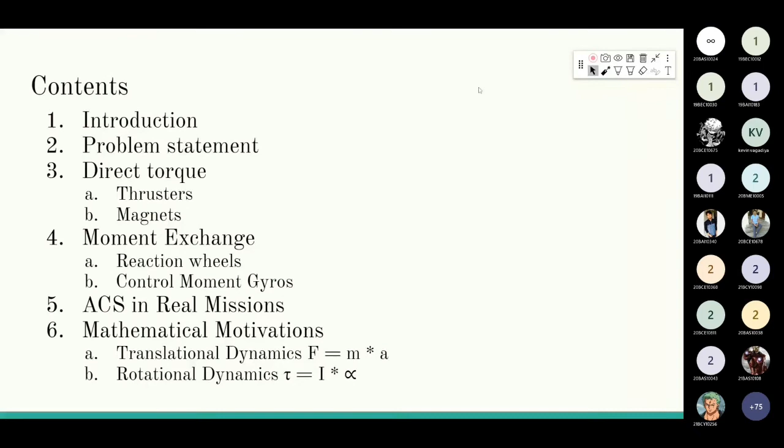Before continuing with the attitude determination and control system, I'd like to mention that Thanosat-1, the small satellite built at Orion Space, is about to be launched in January 2022, and it is already on its way. It is a very proud moment for us, because it is not only the second satellite launched by Nepal, but the first satellite that is completely built and about to be launched from Nepal.

And this is the satellite. Most of us are already aware of this fact, but if any of us are not, I'd like to mention that when we talk about satellites, we are not always talking about the big satellites that we see on TV and the internet. Satellites can range from the size of a house to the size of a Rubik's cube, and the reason behind that is because developing countries cannot dedicate their finances to the development of larger satellites.

So the concept of small satellites was introduced, so that even a university can provide the money to develop, launch, and operate satellites. And that is the class of satellite that we are working on in Orion Space. Those satellites go by the name of CubeSats and PicoSats.

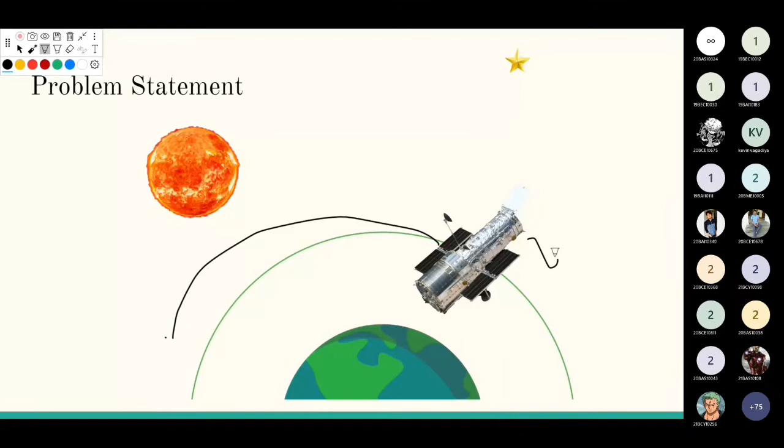First of all, let us imagine that we have a satellite orbiting around the Earth. This image is of the Hubble Space Telescope, so this satellite itself is a large telescope. Let us assume that the Hubble Space Telescope is supposed to take the image of a star known as A. But we can already see that from where it is now in orbit, it cannot point its telescope towards star A, because it is aligned in a direction that is not towards star A.

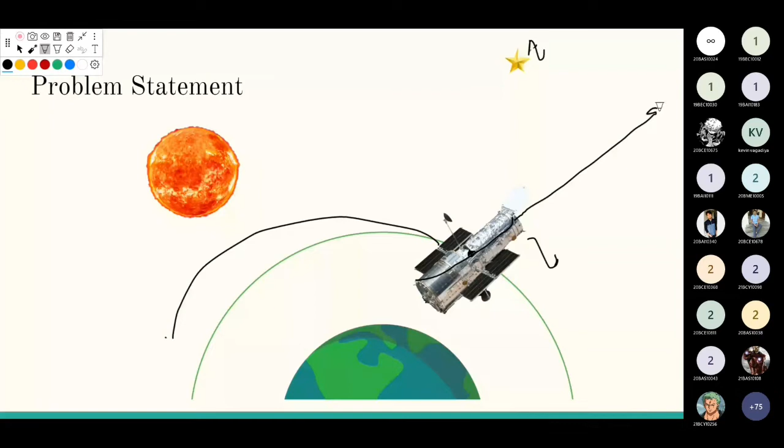So this is the problem statement we face when we build a satellite that needs pointing applications. And it need not be a telescope, it can be a camera. Let's say we have a satellite fitted with a camera and we are supposed to take images of India. When it is in orbit, if our camera is pointing towards the black void of space, then we are not able to take the image of India, because our camera is not pointing toward India.

So in such cases, what we need to do is rotate our satellite such that the sensor fitted in the satellite points toward the direction that we want it to face. So in our scenario, let us suppose the direction that our Hubble Space Telescope is facing right now is B, and the direction that we want it to face is A. So we need to rotate our satellite so that the telescope is pointing toward the star. And this is the type of problem that we are talking about when we talk about attitude control system.

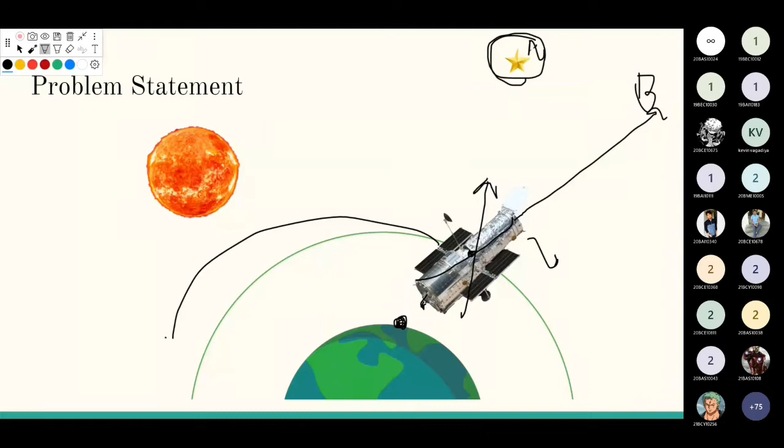So let us talk about the name itself. It seems funny because the word attitude comes with the word satellite, and please don't get confused by this, because the word orientation is often replaced by the word attitude when it comes to space technology. So whenever we talk about attitude in space technology, we are talking about the orientation of the satellite with respect to the Earth. So the term is attitude control system. We saw that attitude means orientation, so we are talking about orientation control system.

And as we can see from this problem statement, the orientation of our satellite is towards B, but we want our orientation to be towards A. So in order to do so, we need to point our satellite from B to A. And that sort of problem, where we take the present value of our satellite to the desired value, is known by the name of control system. So the attitude control system means the subsystem of the satellite that deals with pointing the satellite toward the direction that we want it to point.

So now we have formulated our problem statement. The content of today's talk, if we go in detail, is actually very vast, and mathematically it is also very rigorous. So the flow of talk that we have designed for today is what sort of technologies are used to rotate the satellite in its orbit. So before going on, it is very important to mention.

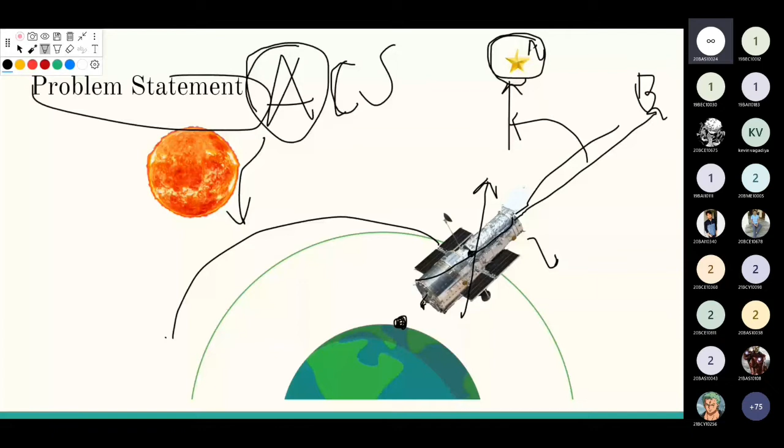Excuse me, sorry to interrupt, but your voice is a little bit low. It's not stable. Okay. Can you hear me now? Is it good now? Yes, it's good now. It's fine. Thank you so much.

And I'd like to mention that, as I have already talked about before, the satellite might not always be equipped with a telescope. It might have a camera or it might have a unidirectional antenna, the type of antenna which needs to face towards its receiver. When we use our phone, we need not worry about where the antenna of our phone is pointing, because the type of antenna it uses is known as an omnidirectional antenna. It captures electromagnetic waves from any direction. But if our satellite was equipped with a unidirectional antenna, then we must make sure that the satellite is pointing towards, let's say, India, so that the ground station of India is taking the signals emitted by the satellite. So in such scenarios we also need pointing, and so we need the attitude control system.

Similarly, we need attitude control system in interplanetary travel. Let's say this is Earth and this is the Moon where we are supposed to travel, and let's assume this is the trajectory that our spacecraft is supposed to follow. So we must make sure that our spacecraft is going in the direction that was already pre-planned. If our spacecraft is directed toward this direction, then the members on board will never reach the Moon. So attitude control system is also very important in such scenarios.

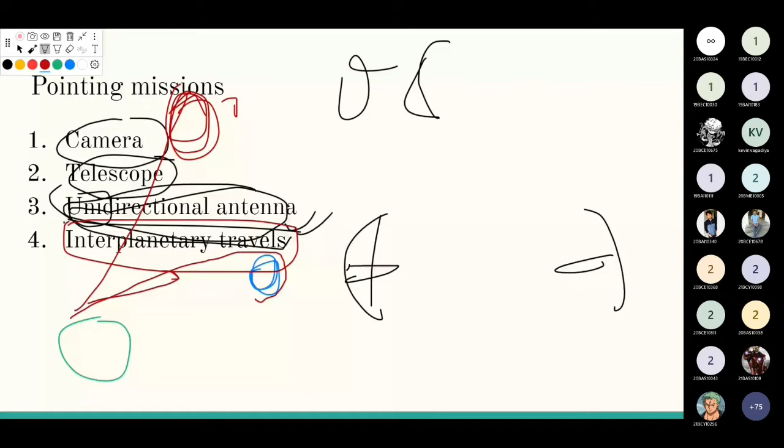So the first type of technique that we will use is known as the direct torque technique. And I think the term direct torque technique is not actually the term used in literature. I have used this term just to classify the type by which we move the satellite. So it will be better if we go into what direct torque means instead of pondering upon the term itself. So let us suppose that this is our cube satellite,

and also let us suppose that this green arrow denotes the direction of the camera, and currently our camera is facing toward this direction. And let us also suppose that we want our camera to face towards this direction. So the most reasonable thing to do in this scenario is, if we assume that the center of mass of the satellite is this, then we can provide torque from this direction so that our satellite will rotate in the counterclockwise direction, and the green arrow, that is the present orientation of our camera, will match with the expected direction of our camera, so that our camera will face toward the direction that we want.

This is the direct torque method. You actually apply torque to the satellite so that it rotates. But there is one huge problem. Let us imagine a man applying torque to this point on this vehicle, and he is using this rod to apply the torque.

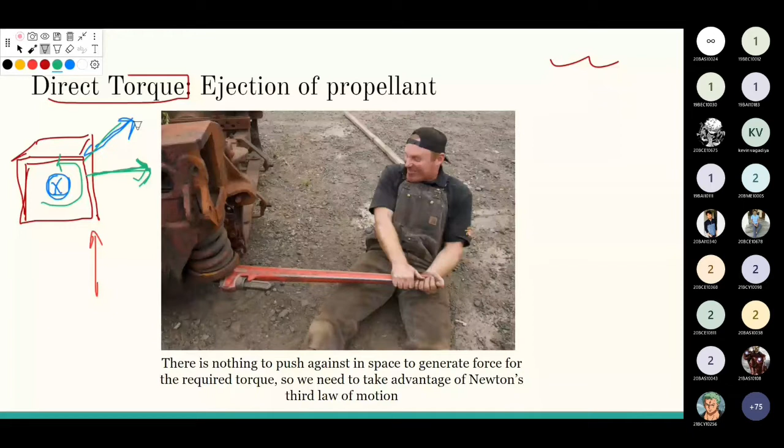And it is common experience that in order to apply torque, we always push against something. Let us suppose this was a wall and this was a person pushing the wall; then his legs are pushing against the floor in order to provide enough force to the wall. And in this case also his legs are pushing against the ground so that he can pull this lever more strongly. But it is a very well known fact that there is nothing in space to push against, because space is void in the vicinity of our satellite. It is only our satellite that exists in space.

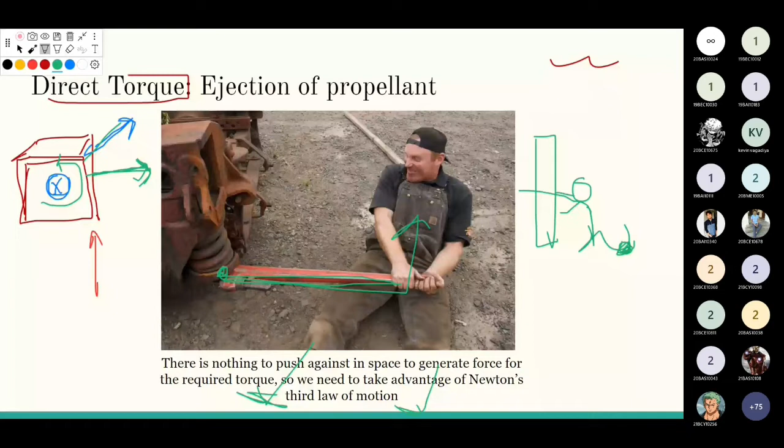So in order to provide the torque that we need to direct our satellite to the required direction, we do not have any point to push against. And that is the real problem. So that problem is solved by taking advantage of Newton's third law of motion. Instead of imagining that we need to provide torque to our satellite from an external direction, we can do something creative. That is, we can eject some high speed particles from the satellite in this direction.

And we know that Newton's third law of motion says that for every action there is an equal and opposite reaction. So if we eject high speed particles from this point, our satellite will experience an opposite force in this direction. Let's say this was our satellite and this was our man, and his legs should be pushed against some firm ground in order to apply torque. So this was the problem. So we eliminate this man and we put some sort of nozzle which emits particles at very high speed, so that an opposite force is applied in this direction, which works as if the man was pulling the lever.

So when it comes to attitude control systems of satellites, there is always involvement of some sort of propellant. This example can directly be related with how the rocket works. Let's say this is the rocket and this is the nozzle, and when the fuel is burned above the nozzle, high speed combustion happens and the opposite force is experienced by the rocket, which is lifted off the ground. In a similar fashion, now we are not putting our nozzle aligned with the center of mass, but offset from the center of mass, so that instead of moving forward, our cube satellite rotates toward the direction that we want it to rotate.

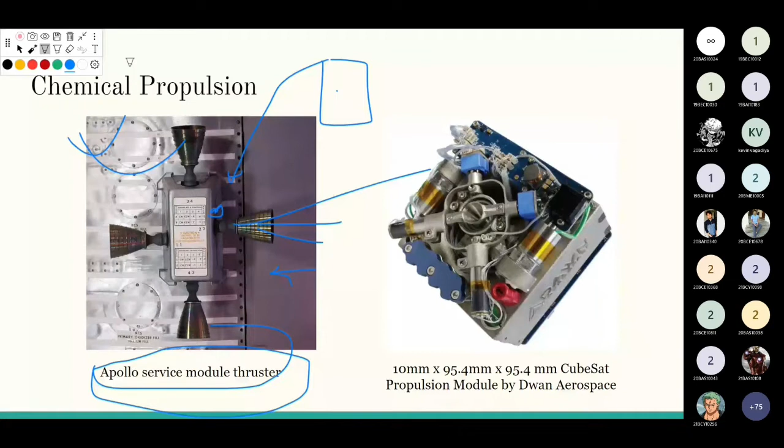And this picture is of the Apollo service module that was used in the moon mission, but it is for the large mission. This sort of chemical propulsion is also used in small satellite missions. For example, this propulsion unit that was developed by Dwan Aerospace is 10 mm times 95.4 mm times 95.4 mm.

So we can imagine that small modules are also made, but there is one strong disadvantage, that is the propulsion element inside the fuel tank might get finished, and as the satellite itself is a smaller one, there is not a chance of putting a large amount of propulsive element, chemical, inside the tank. So chemical propulsion systems are attractive only to larger satellites, but are not widely used for small satellites.

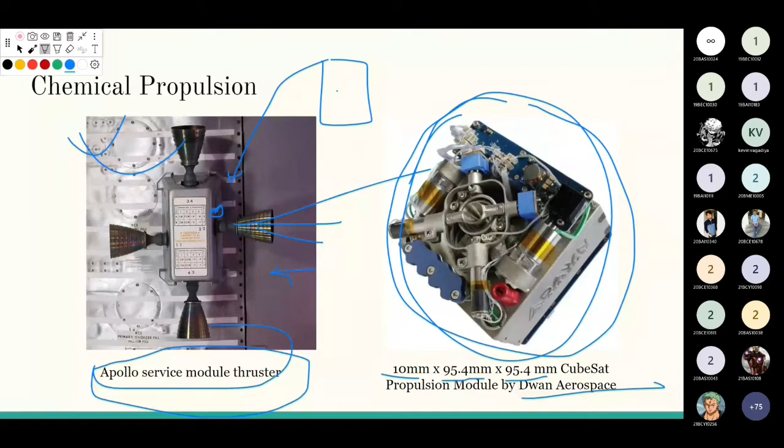And propulsion for small satellites is also an area of active research interest. And I've included some of the projects that I found very interesting while I was researching in this field. And the next type of propulsion system that provides a direct torque is the micropropulsion system. The mechanism of how the micropropulsion system works can be evaluated from this contraption here.

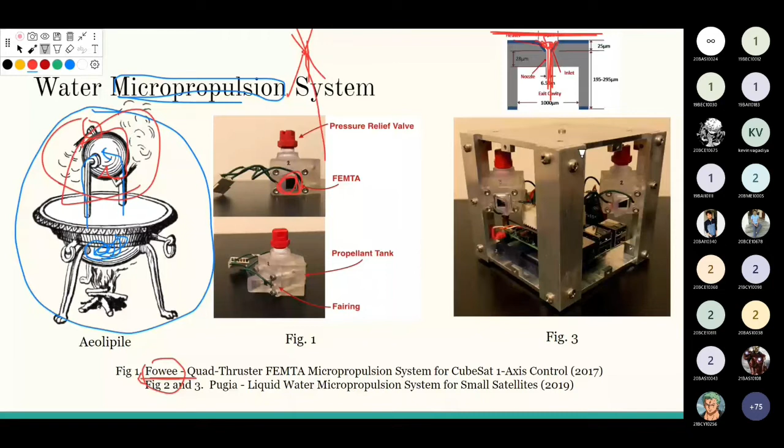And you can see this is a CubeSat, 10 centimeters by 10 centimeters by 10 centimeters, and they have created this one module. So they successfully used these three modules in the CubeSat in order to demonstrate the effect for their thesis. And it was a very interesting project. And the drawback of this system is, as always, there is a limit to how much water we can put. But the advantage is that they developed the system so that with less electricity, they could provide reasonable torque to move the satellite. So this is one of the interesting recent projects.

As you can see, the second version of this project was done by other students of the same research professor with whom Catherine works, and they actually extended the project of 2017 to their own thesis in 2019, and developed a better version of the project that was done before.

And this is one class of propulsion system, and there is another class of propulsion system where the idea behind the provision of torque is the same. There is always ejection of some material at high speed, but the way the material is ejected is different here. In this system, the propulsive elements are ejected by strong electric fields. And I have provided the link to the project that I have taken this image from in this slide, which I can share after the talk also.

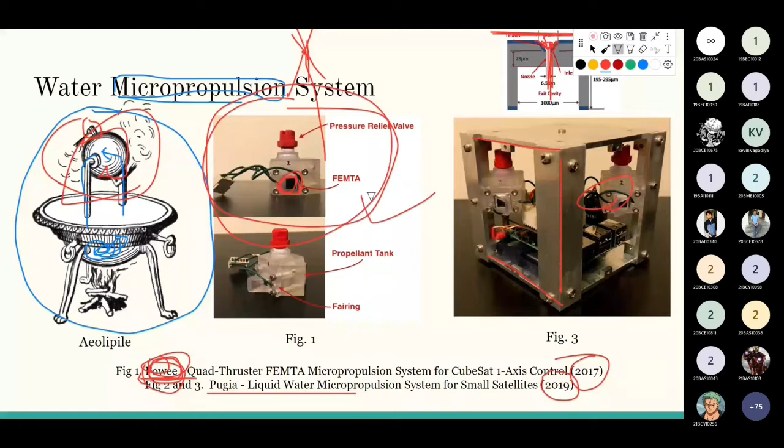So we finished the class of methods that can provide torque, which we named direct torque. And as already mentioned, these types of systems are not yet fully developed and are in the research phase, and they are not attractive when it comes to setting up in our CubeSat. They are only used for experimental purposes, but they are getting better. But the ones that are already established and widely used in space missions are those which use magnets. So how do magnets play their role in the attitude control system?

Let us dive into that. Let us suppose that I have a satellite and I have fixed a permanent magnet in it. So when my satellite is deployed into the orbit, my satellite starts moving. It rotates around the orbit, but it also rotates around its own axis. The term is tumbling. So it is moving forward in orbit, also rotating on its own axis.

So what happens is that if we put one permanent magnet inside our CubeSat, the magnetic field of the permanent magnet and the magnetic field of the Earth interact until the magnet inside the satellite is aligned with the Earth's magnetic field. So it is very simple, a control system that works without any coding or software.

You just plug a permanent magnet inside your satellite, but there are also some points where we can be clever. We can align our magnet in such a way that whenever it aligns with Earth's magnetic field, when it is above India, we place the camera such that it will point towards India. So we can be clever.

And I'd also like to mention that SANOSAT-1, which is about to get launched, uses this sort of technology. It uses passive magnetic attitude control by using a permanent magnet. And for our next satellite, we are working on a more advanced type of control system which we are going to discuss now.

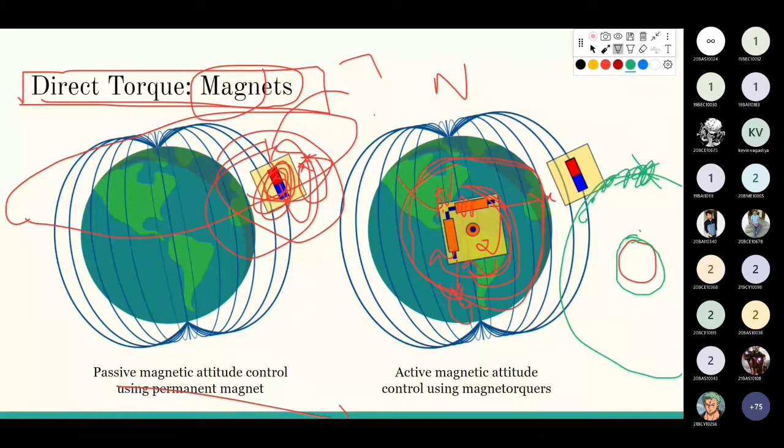So this type of magnetic technology is only used in low Earth orbit, that is those orbits which are very near to the Earth. And CubeSats and PocketSats are usually low Earth orbit satellites, so it is a very reasonable technology for cube satellites.

But I think the most widely used and most effective type of actuator, the technology that we can use to rotate our satellite to our desired direction, is known as momentum exchange technology. So what I want you to do is imagine a motor where, let's say, I have fitted a ring. The ring is manufactured such that it has high moment of inertia, and it is fitted on the motor, and the motor itself is fitted on this plane. And let us imagine that this plane is one side of the satellite.

So in this setup there is a motor and there is a wheel with high moment of inertia, and that is known by the name of reaction wheel, or we also call them flywheel, but in space technology we call it reaction wheel. And the motor itself is fitted to the satellite body. So let us assume that the motor was at rest, and if we suddenly rotate the motor in this direction, then the satellite body will rotate in the opposite direction. That is known as momentum exchange.

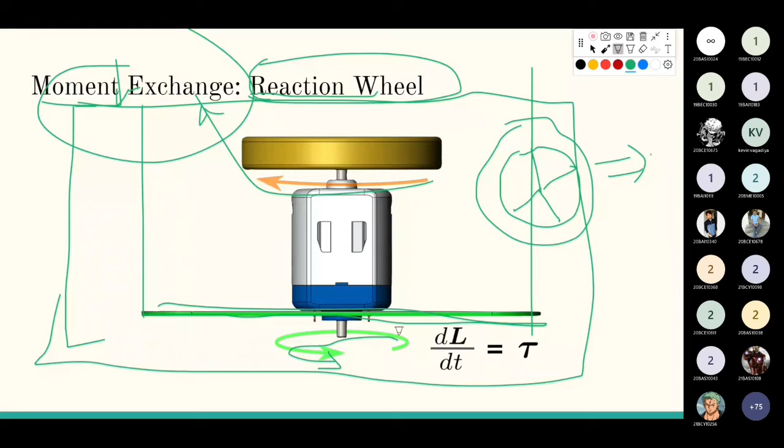And the physics behind this phenomenon is that when both the motor and the wheel were at rest, there was zero momentum, and when we rotated this wheel suddenly in one direction, momentum was created in this system. We already know that in a closed system the momentum is always conserved. So we had zero momentum to start with, so in order to conserve the momentum that was created by this reaction wheel, the satellite body will itself rotate in the opposite direction. So this is how we can move the satellite body, and this is a very effective one.

So the rate of change of angular momentum gives us the torque, and this is how we generate the torque in order to move our satellite. So this is the setup that we work with in Orion Space. And actually I was about to put one video for the demonstration of the reaction wheel control system. I think it will be lengthy if I start the video on my laptop now, but I will mail it later so that you can look at it.

So how this works is that here is a spherical air bearing. We put air inside here. There is one opening on the other side. So when we put the compressed air inside it, this transparent ball floats in the air, because there are holes in this structure, and the compressed air that we feed from this point is equally distributed from these holes, and this lifts this transparent plastic.

So we have simulated the low friction environment on the Earth, and inside this mock-up satellite we put the reaction wheel and motor, which are actually like this. And what we do is, we command this satellite to point in a certain direction, and we rotate this reaction wheel in such a way that the orientation of our satellite matches the desired orientation that we want to gain.

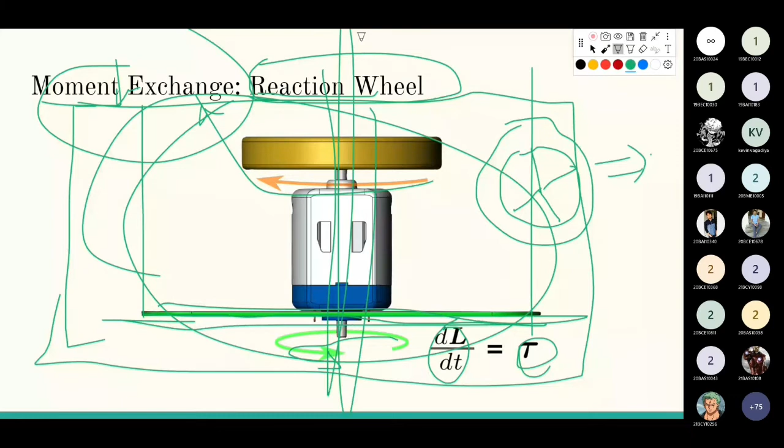But in this system we only talked about one reaction wheel, and it will move the satellite in only one axis, about the axis of this reaction wheel. But we can equally attach three sets of reaction wheels in our satellite. So it will be better if you imagine this picture in this way. Here is one reaction wheel in this axis, here is another reaction wheel, and here is another reaction wheel.

So what you do is, if you want to move your satellite in this direction, you rotate this reaction wheel. If you want to move this satellite in, I'll make the coordinate axis x, y, z. So based on about which coordinate axis you want to rotate your satellite, you move the reaction wheel on that axis. So again, there is one question here: what is the mathematics, what is the physics, or what is the system that determines how to move our satellite based on the

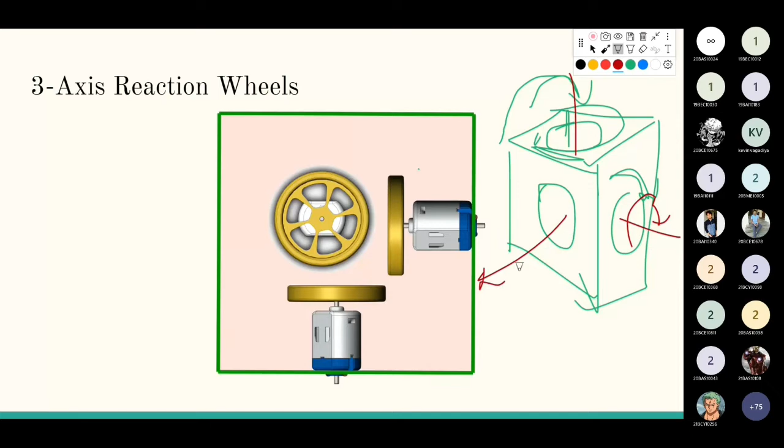view of control theory? So as I have already mentioned, this is a wide topic, and that will not be covered, but I mentioned this to let you know that control theory is extensively used in this system. So if you are interested in robotics or control theory, this attitude control system of satellite might be the best thing for you.

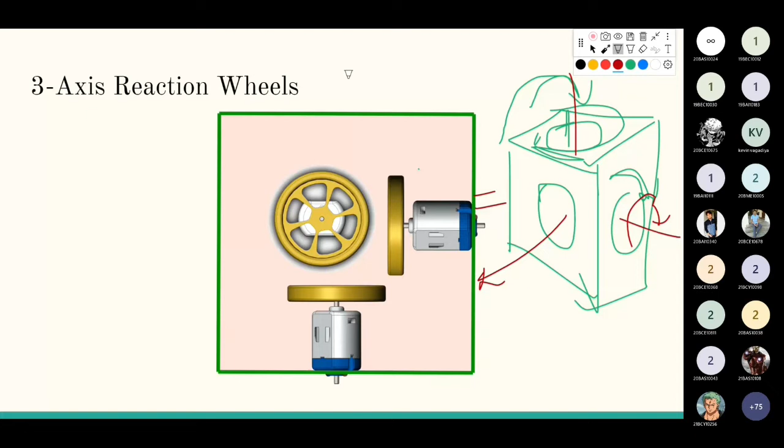So what we talked about now is this reaction wheel, and how it works is that it creates the change in angular momentum, and in order to conserve that angular momentum, our satellite body moves so that we can achieve our desired orientation. That was the logic behind it. And the main principal point behind this reaction wheel is that our reaction wheel was always fixed on the satellite body. As you can see, reaction wheel on this axis is fixed here, on this axis is fixed here, and on this axis is fixed on this side perpendicular to the plane, along the plane of our laptop.

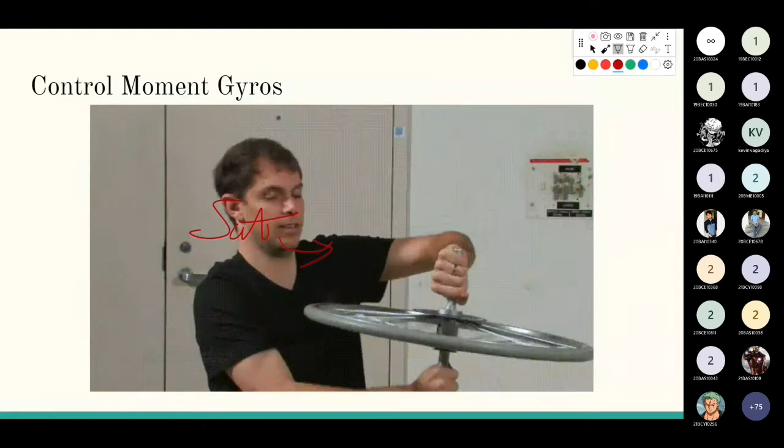So there is another way you can play with reaction wheel and create the rotation of satellite. So you can assume this man to be satellite. Suppose that this man is satellite, and you want to rotate this man as he is doing in this picture. So what you will do is, you will rotate this reaction wheel in one speed, but instead of changing the speed of reaction wheel and creating the change in angular momentum, what you do is you rotate the reaction wheel,

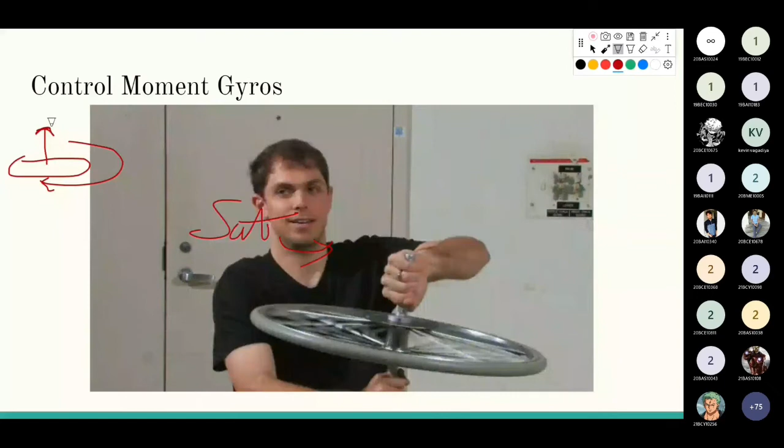and for refresher, I would like to mention that whenever one wheel is rotating in the axis, the angular momentum is along the axis, given by the right hand rule. So in this diagram, if I wrap my right hand around the direction of this motion, the arrow will point upward. So the angular momentum of this wheel is upward.

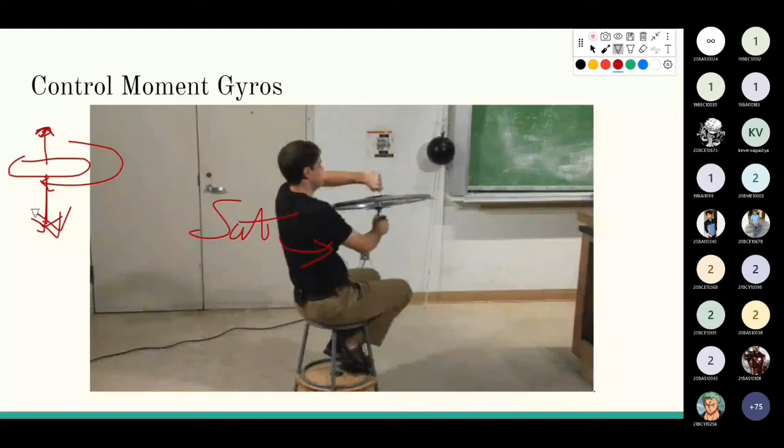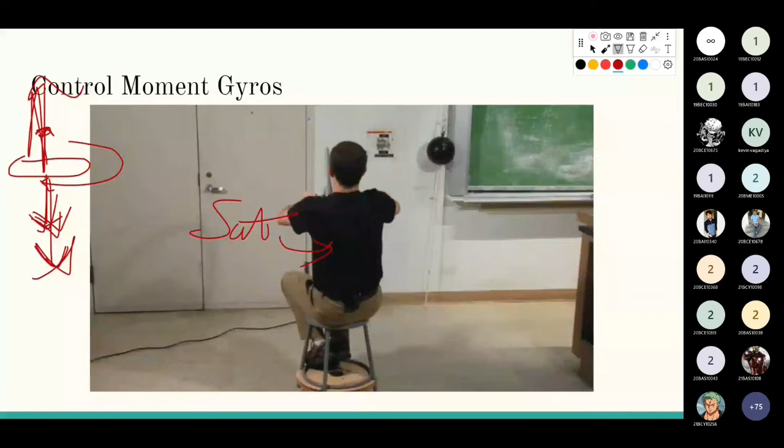So what this man is doing is that he is rotating a reaction wheel, and he is changing the direction of angular momentum, because while he was pointing upward, the angular momentum was pointing up, and when he moved the wheel below, the angular momentum now is pointing downward. So in order to conserve this angular momentum, his body is moving so that the complete angular momentum of the system is conserved. So that is the principle behind the control moment gyro.

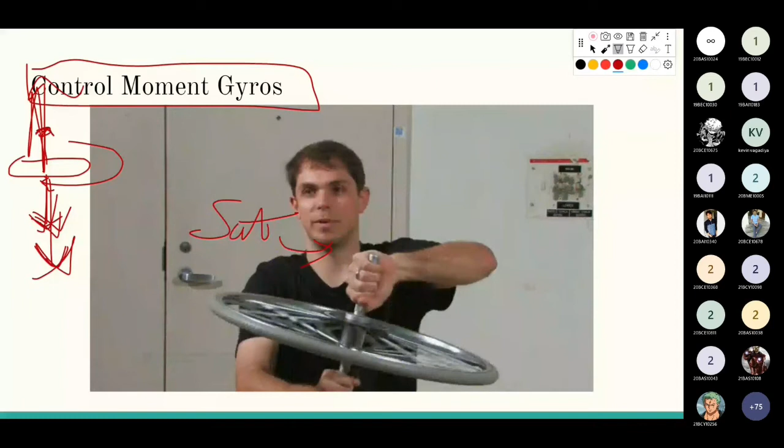If I made you confused, then you just need to keep two things in mind. In reaction wheel, it is the reaction wheel that accelerates and decelerates, and that acceleration or deceleration creates the change in angular momentum. And in order to conserve the angular momentum, the body of satellite moves, because the body of satellite is fixed with the motor. But in case of control moment gyro, we can rotate the reaction wheel, but the motor on which the reaction wheel is fixed itself can be rotated. So it can be demonstrated by this figure.

So actually in ORION space we will be working with reaction wheel, because control moment gyros have an elaborate mechanism that is very hard to fit inside a CubeSat. But I found this project by Prabhakaran, named Adaptive Singularity-Free Control Moment Gyroscopes,

that he did in 2018. And what I liked most about this project was its fabrication of the control moment gyro, because if you look on the internet, the mechanism of control moment gyro is very elaborate, and at first look it already looks like a complex thing, but this mechanism is, I think, the best one in my view. So I thought I'd better share it with you.

So by taking analogy of this man, what we can see is here is a reaction wheel and here is a motor, and this motor can rotate this reaction wheel. If it were a reaction wheel based control system, then this will be our satellite body and it will be done. But it is control moment gyro. So what is happening is that this axis can be changed in control moment gyro, as this man does it with his hand.

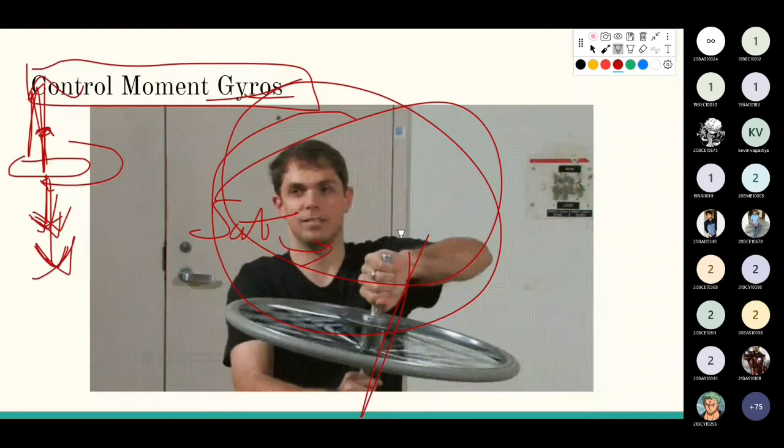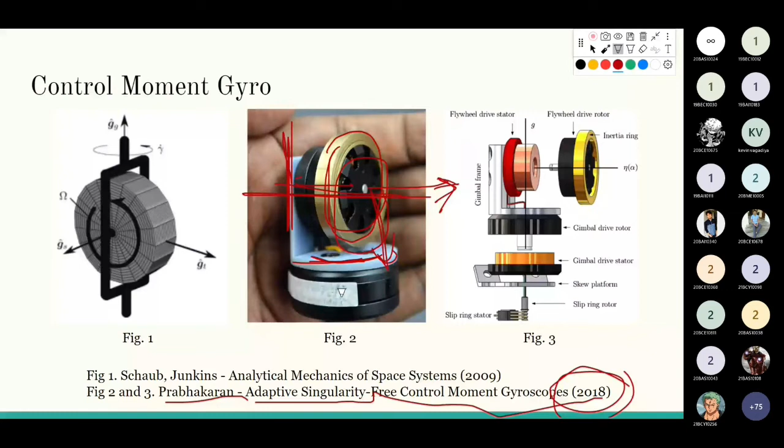In this case also, the axis about which the reaction wheel is rotating can be changed by another motor which is below. So whenever the motor below rotates, the angular momentum which is pointing toward this direction right now, let's say, points toward this direction, and in order to conserve that angular momentum, the whole body of the satellite moves, because this motor is fixed in the satellite body. So this is the control moment gyro, and this is the figure that is sort of schematic for this.

And if you are interested, since I had already cited this book, I'd also like to mention that this book by Hanspeter Schaub is a very nice book for understanding the mathematics behind the reaction wheel and control moment gyro. So if you are interested, you can just take a screenshot and look for this book.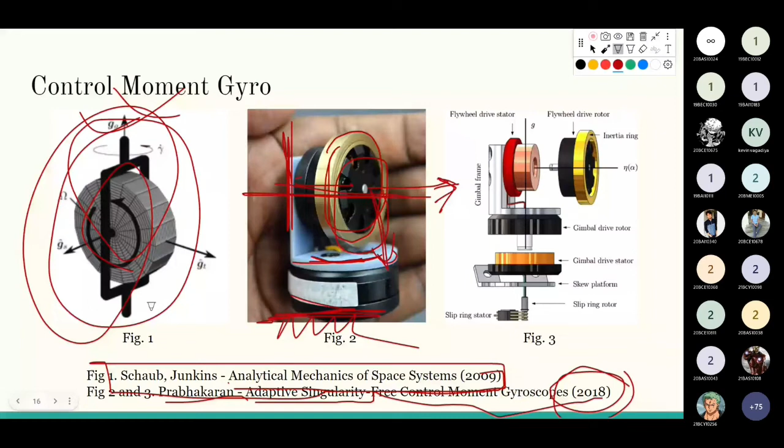And this is all regarding the control moment gyro, but there is another great project by TensorTech, and TensorTech is a company based in Taiwan, and we, as ORION Space, talk with them constantly, and we take their advice and consult them regarding the attitude control system, because they are already established in this field, and with their permission, I included this photo of what they call the reaction sphere.

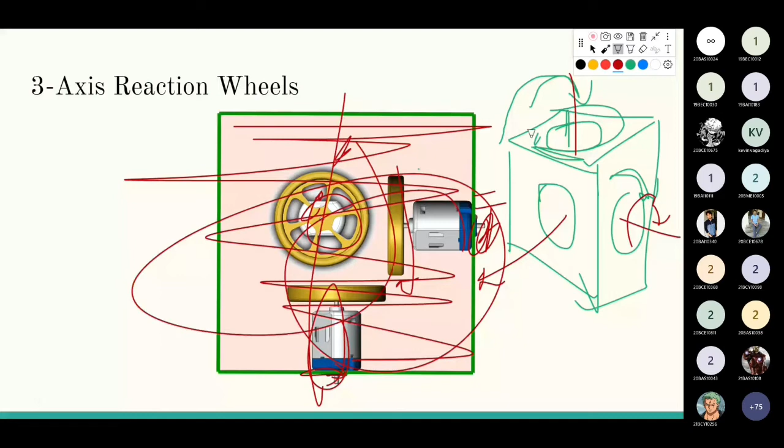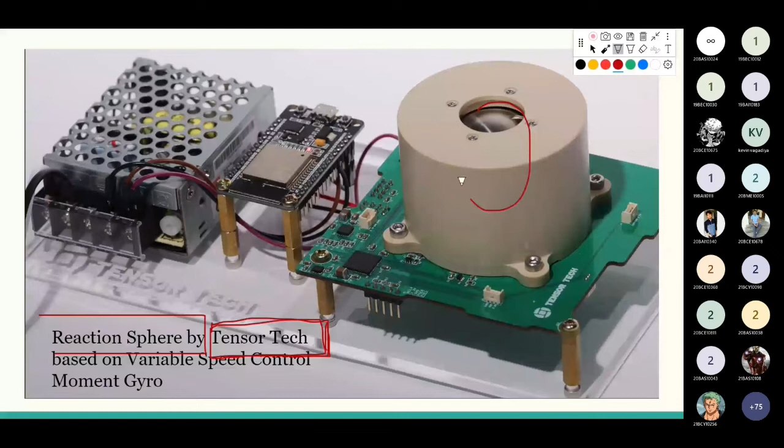So as you can see, in the above examples, you need three motors to control three axes of the satellite. But they have created this reaction sphere where inside here is a sphere ball, which interacts with the electromagnetic coil they have made around here, and with this single mechanism they can provide 3 degrees of freedom. So it is very interesting technology, and the working principle behind this technology is the control moment gyro.

Although at first sight here is a sphere and the sphere is rotating, it does not look like a control moment gyro, but if we see its design in detail, and if we were to mathematically model it, then we'll use the mathematics behind the control moment gyro.

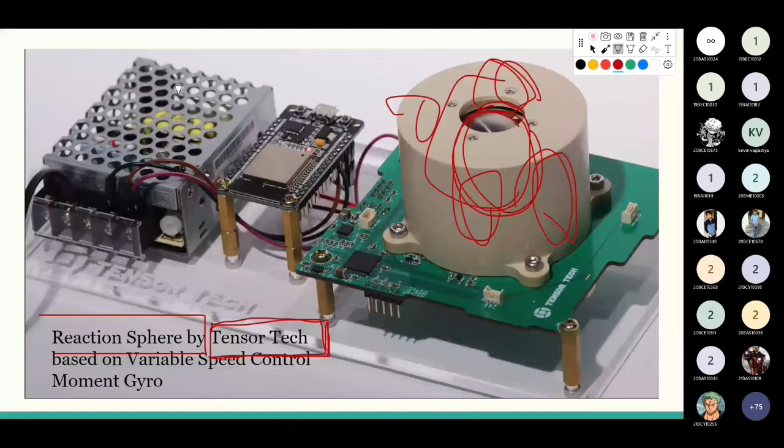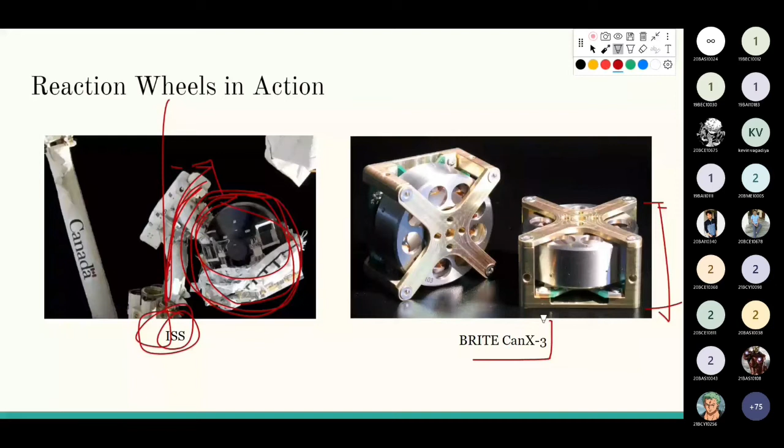Finally, I have come to the point where I wanted to share the mathematical motivations behind the things that we talked about, because if we were to divide what we discussed, we are doing an attitude control system, and there are two ways to achieve the torque to move our satellite. One is by direct torque, which can be done either by propulsion or by utilizing Earth's magnetic field. And there is another class of technique that you can use, that is by using the change of angular momentum.

But the time is already 8:45, so I think we started a little bit late. So I'd like to ask, I think there are only 2 or 3 slides, and if it is late, we can stop here. But if you want to get mathematical intuition and motivation behind the things that we just discussed, then I can go further also. Then, what will you suggest? We can continue. We can continue with the further slides.

Thank you. And personally, my interest is also mathematical modeling. Even though I am a student of electronics and communication engineering, I always loved physics and mathematics, and I think this is common for people who are in their 12th grade or in their bachelor's, because mathematics seems to be a very interesting topic. But sometimes there is also a problem that I personally faced: I was very interested in mathematics, but I did not know mathematics, and I did not know where to start from. So that is the problem related to guidance, because if the teachers are good, then the students are good.

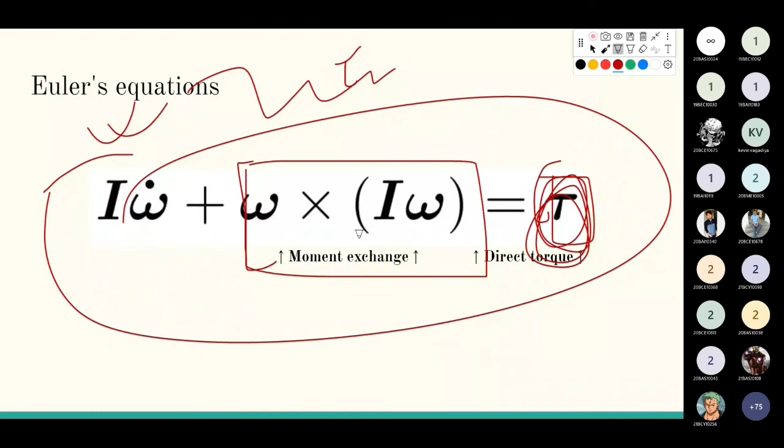So let's say you are mathematically modeling your satellite and you find that whenever you fire the thruster in your satellite, the amount of torque is this much. Then you put that amount of torque in this value, simulate this equation, and find how your satellite will behave. Or if you put a reaction wheel in your satellite and want to simulate its behavior, you find the angular momentum of the reaction wheel and put it in this part of the equation, and your reaction wheel is simulated.

So this is how the whole content of our talk fits into a nice equation, and I think this is the part where I'd like to stop my talk.